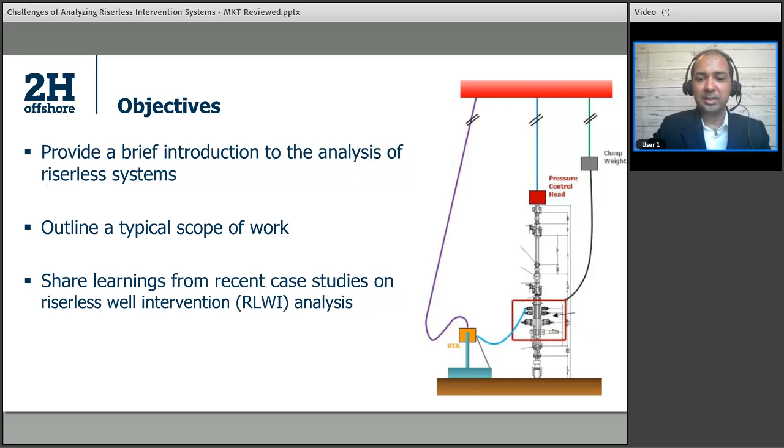The objective of this presentation today is to provide a brief introduction to analysis of riserless well intervention systems. We'll go over the typical analysis scope of work, since this is an analysis-focused presentation, but we'll also look at some of the components involved in riserless operations. We also have a case study on recent projects and work that we've done, so we'll share some learnings and findings from that as well.

We'll start off with an introduction to riserless intervention. We'll look at different types of interventions, and then specifically focus on riserless intervention and what type of equipment and system level components are involved. Then we'll move on to different analysis types and the codes involved in the analysis of these systems. And finally, the bulk of this presentation will look at the case study we worked on and the interesting findings as well as conclusions from that.

Well intervention is an important activity for any offshore well. It can be seen as a maintenance activity that you do to upkeep the performance of the well or do any repairs. So well intervention is basically your ability to enter a well safely with a well-controlled device and perform operations other than drilling. Depending on the operations performed, intervention can be classified as light, medium, or heavy intervention. Light intervention is the riserless well intervention or wireline operations that we are going to focus on today, and it typically focuses on wireline operations like logging, fishing for pulling out tools, or doing some maintenance activity, or taking readings on the well using sensors.

It may also involve some type of subsea pumping or circulation of fluids from the well. Medium intervention, on the other hand, is typically your coil tubing type of operation done for well stimulation or a few other things like zone isolation or reperforating a well. And then finally, you have heavy intervention, which can be looked at as a workover operation.

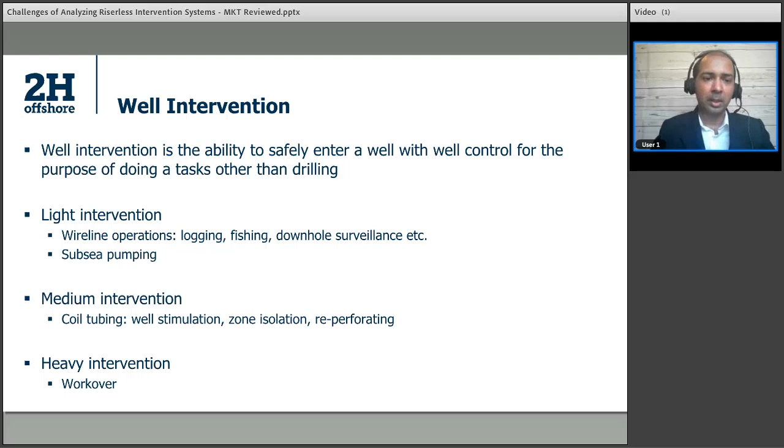You can look at the differences in these three types of operation in this picture. On the left side, you see light well intervention, which is the wireline operation, and typically this can be done by a small vessel. So the vessel required is not very high specification. It can be done from an offshore construction vessel or a small intervention rig. We've also seen that in shallow water, you can use barges for these operations. Basically you have a wireline and some downlines run from the vessel that interface with a subsea intervention package.

In the middle picture, you can see medium intervention that typically involves a small bore riser. This is typically a drill pipe riser, either between 5 to 7 inches of bore, and you have an intervention package subsea, and also a tensioning system from a tower on the surface. Finally, to the right, you have heavy intervention, which typically involves a drilling riser and a BOP package, and you can do much more complex and heavy operations with this. You can even run a landing string or another riser inside of this to either pull your tubings or do much more complex operations.

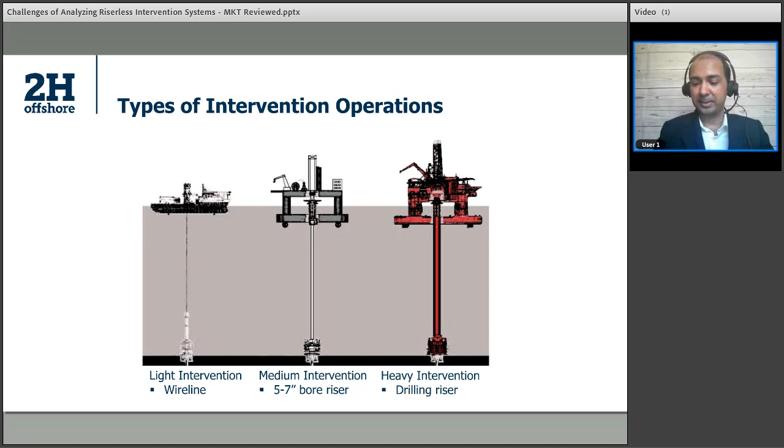So why riserless well intervention? The main benefit of this small lightweight riserless well intervention is that it's a very cost-effective solution because most of the time you need a small rig or a vessel of opportunity that can be used for this, which tend to have lower day rates.

And the equipment involved is also things like your wire lines, coil tubings, umbilicals, which is low cost rental equipment when you compare to typical offshore expenditure that you have on drilling and other activities.

So we came across this case study published in Offshore magazine where they showed that typical cost of this intervention operation was around 6 million. But by doing that operation, they could see an improvement in production of around 3,000 barrels per day from the well. And just based on the calculations, they could see a net present value of around 30 million by doing this operation over a period of 3 years.

So basically, the operation paid itself back in less than 3 months, and then you have this good increase in production from your well. So especially if you're in a low oil price environment where there's a lot of restrictions on operational expenditure, this can be a very cost-effective solution of boosting production from your wells.

So moving on to the system itself. This shows a layout of a typical riserless intervention system that we worked on. What you can see is you have an offshore vessel and you have an intervention package which is deployed on top of your well.

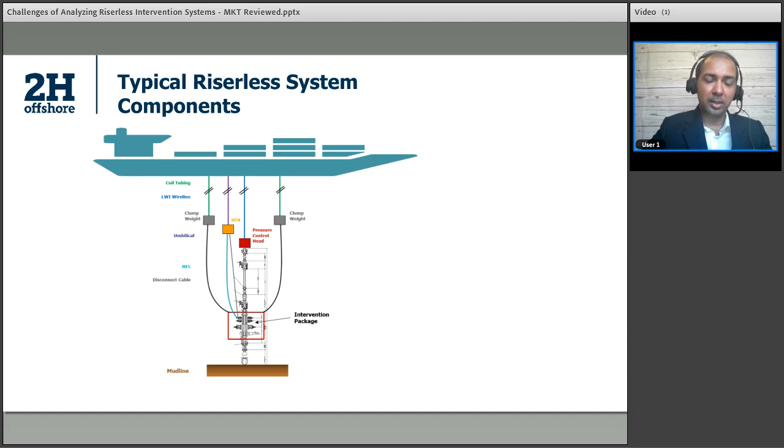And then you have these different downlines run from the vessel. In the intervention package subsea, you have these different components and they can vary based on the OEMs who are manufacturing it, but typically you would have a pressure control head, which is a sealing element that allows the wire line to move in and out without any leakage.

Then you also have an upper and a lower lubricator package. This allows for shearing of the wire line if there's a need for that. And finally, you have a well control package at the bottom, which is a primary well barrier, and it can be used again to shear the wire line or the tool string or coil tubing. It also provides power to the subsea tree for performing different operations.

On the line side, in the middle, the blue line you can see is a wire line which is run from the vessel, and it goes inside your intervention package through the pressure control head, and that's where you run your tool string. On the left of that, the purple line is an umbilical with an umbilical termination assembly at the bottom of it, and then a flying lead which goes from the UTA to the intervention package.

And depending on the operation that is to be performed, like in this case, they needed to circulate some fluids and pump some fluids. So they had two coil tubings, which are these green lines suspended with clump weights at the bottom, and another flying lead going to the intervention package. And these were Black Eagle types of hoses with passive disconnectors in them.

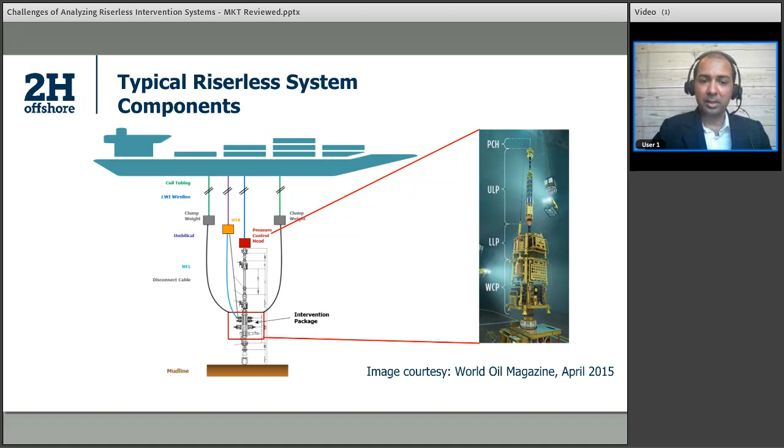So this just shows a layout of a typical system, but this may not be the exact system because there can be variations of this. There can be more downlines or less depending on what the purpose of the operation is.

So looking at analysis types and the scope of this work, typically the first thing that you would do is come up with a configuration for the system. So on the previous picture you saw you had these number of downlines. So you need to come up with optimum parameters for them.

So what should be the weight? What should be the clump weight? Do you need any buoyancies for your flying leads? How should they be spaced out with respect to the intervention package? How much slack do you need in the system? So you need to optimize all these parameters in order to have a functional system. So that's the first step.

Once you have that, the next thing you do is operability analysis that tells you what are the operating limits for doing these operations in terms of the allowable vessel offset, the current speeds in which this operation can be done, and also the wave heights.

And you do that by looking at a number of response parameters like how much stroke do you get in the wire line. Is there enough headroom for the wire line to accommodate the heave and the motions from the rig? The MBRs for these different flexibles and hoses that you have in the system, and then also stresses in your structural components like the coil tubing.

You also look at the drift-off analysis to see what happens in case you lose power, how fast the rig would drift away, and how much load it would put in the system. A weak point analysis is also an important activity, but different from a riser analysis where you're trying to see what would fail on the well. Here, the objective is to come up with sizing for different passive disconnect systems. I have a few slides on this, so I'll come back to it later.

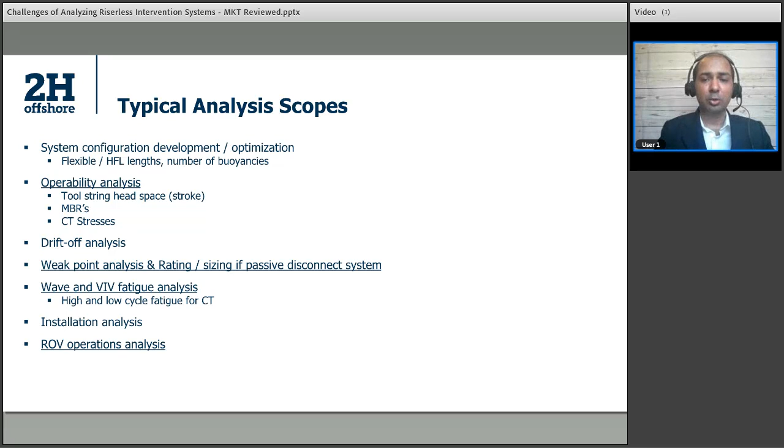Basically, we're trying to come up with the loads at which different downlines would disconnect from the well. You also need to look at fatigue analysis of the coil tubing because it's quite sensitive to environmental loads. We also look at installation analysis, both for the coil tubings and downlines, and for doing ROV operations.

Looking at design codes, the main challenge for analyzing riserless well intervention systems is that there's no dedicated published code you can use. There are a couple of different codes under work. There's API RP17G2, with a committee working on that, and the TR14, an intervention riser analysis technical report also being worked on.

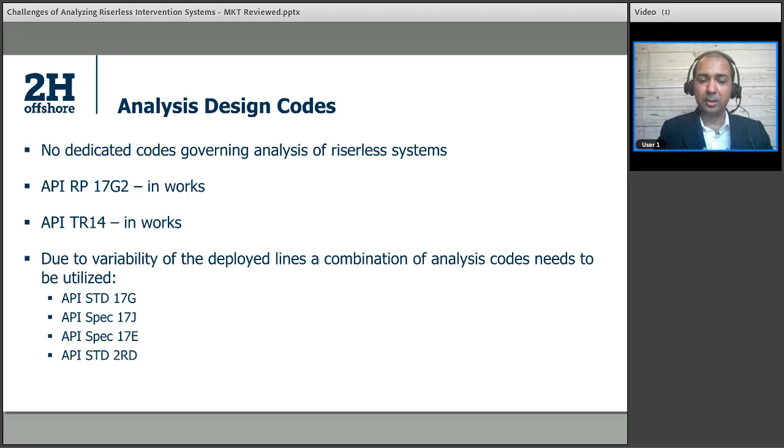Until these codes are published, you look at different options that are already published. You have API standard 17G, the governing code for intervention risers, and also standard 2RD, a global analysis code for production risers. You can use the guidance and methodologies in there. Then you rely on other codes like 17J and 17E, which have guidance for umbilical and flexible analysis. So you do a combination of global codes and component level codes to come up with a scope of work, a design criteria, and methodology for doing this analysis.

So moving on to the case study. We're looking at a well intervention campaign in the Gulf of Mexico. The water depth for these wells was in the range of 7,000 feet, and they had a few different wells.

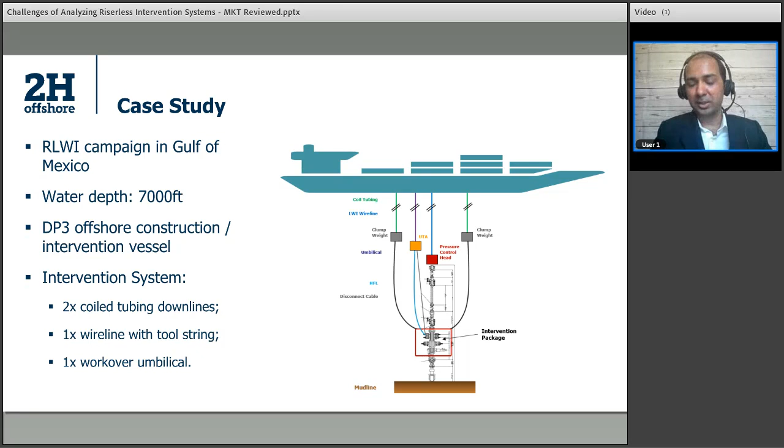These operations were performed using a DP3 type offshore construction rig, a small rig around 100 meters in length. They had a number of downlines: 2 coil tubings, 1 wire line, and an umbilical for the control system. For the umbilical, they had 2 options: one was free hanging as shown in this picture, and another was to install the umbilical on a subsea mud mat and run a flying lead from there.

This shows a top view of the analysis model and the layout of these different downlines. You can see the moon pool of the vessel, and the downline which is the wire line, shown as blue dots at the center, which runs and interfaces with the intervention package. The umbilical itself was run from the side of the vessel, with a flying lead taking it towards the intervention package. We also had 2 coil tubings deployed from the moon pool, not shown in this picture but visible in the model. So you have these different lines run from different locations on the rig, and they all converge at one point on the intervention package.

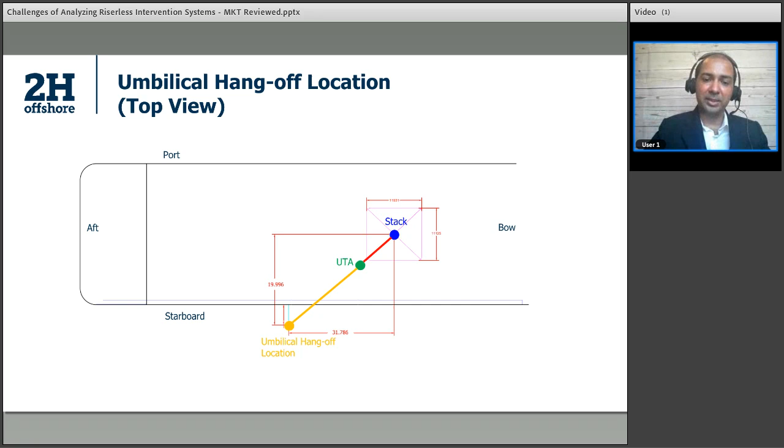When you model this, it becomes a 3D problem, and you can see the different snapshots. On the left is the elevation view. The yellow line is the umbilical with the termination assembly mounted on a subsea mat, with a flying lead towards the intervention package. Here's the subsea intervention package located on the well, with a wire line going through it. On the side you can see the coil tubings, the green lines, and the purple lines are the flying leads or black eagle hose with some slack, connecting with the intervention package. This shows the complexity of the model, because you have these 4-5 different lines which are run, and they are very low stiffness elements, so it can become quite an interesting problem just to build the model, make it converge, and run this analysis.

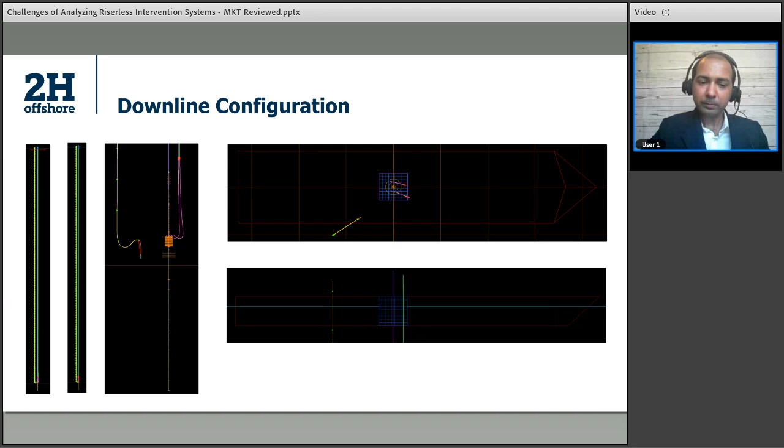So the next step we do is the operability analysis. For this, we're trying to establish the limits in terms of vessel offsets, currents, and waves in which these operations can be performed. We look at vessel offset all the way up to 10% of water depth, so for 7,000 feet, that's 700 feet from the well center. We also looked at surface current speeds up to 4 knots and bottom current speeds of 2 knots, because this particular field in the Gulf of Mexico did have bottom currents.

And then we're also looking at different types of waves, and current directions coming from different directions with respect to these downlines. The objective here is to run this load case matrix, different offsets times the currents times the waves, and then come up with an operating limit or an envelope within which the system can operate safely based on the response parameters of these different lines and their design criteria.

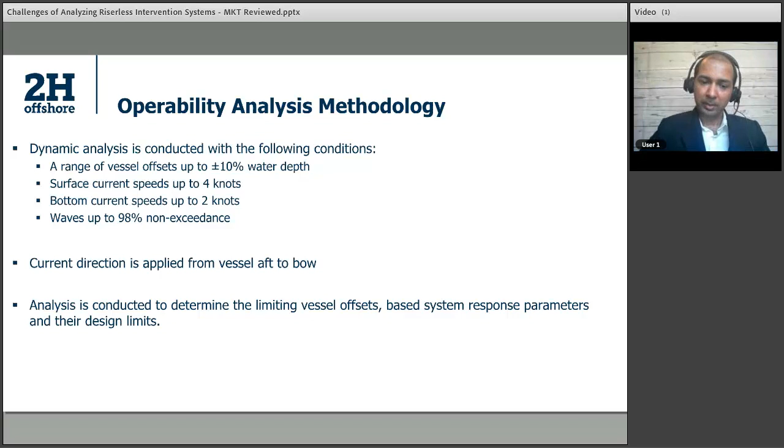So here's one result from the operability analysis. On this plot you can see the safe operating limits for this downline for this riserless system. On the x-axis you have vessel offsets, and on the y-axis you have surface current speeds. These different colors represent different bottom current speeds. This analysis is done for a 95% non-exceedance wave, and we did similar work for different waves, but this is just one example.

One interesting thing you can see from here is if you offset the rig on the right side, or in the positive offset direction, you see there's this connector which is the SECC connector. This is a passive disconnect mechanism in the system. So what it does is if you exceed 4,000 pounds in this connector, it automatically disconnects the line. This is a part of the coil tubing system. So you can see at vessel offsets around 4%, you would exceed the load in this connector and it disconnects.

If you are looking at high surface current velocities, you tend to get a lot of sail in your wireline, and that pulls your tool string up and you run out of headspace on your tool string. Hence this operation is limited by the tool string headspace for higher current speeds. And if you offset the rig in the negative direction, or upstream of the current, you start exceeding your coil tubing stresses. So it's an interesting finding that there's no one component which limits your operations—just depending on the type of load, whether it's current or wave, or the direction in which your vessel is moving, you can have different components driving your operating limits.

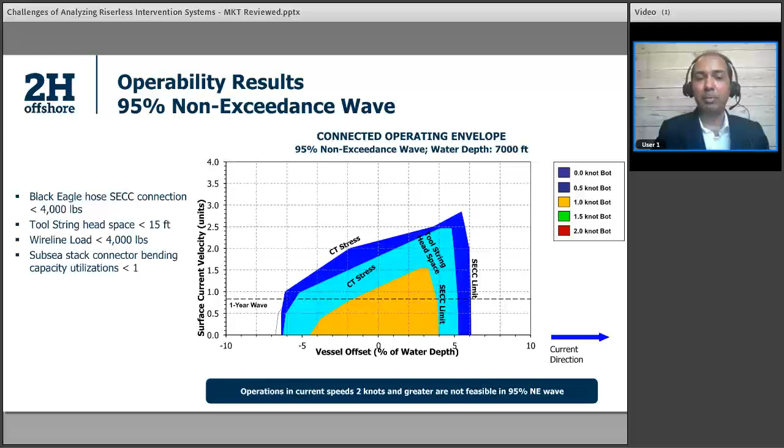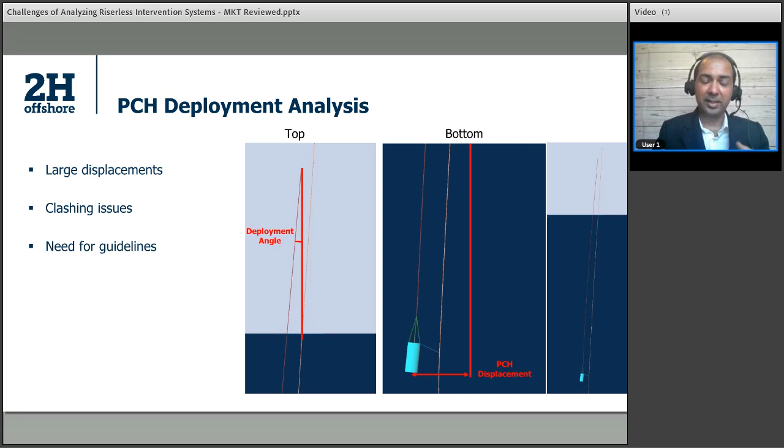So you can make judgments regarding the environments in which this operation can be performed, and also determine the loads in the tether, so you could select the right configuration and specification so that it does not get damaged during the operation.

We're looking at an emergency disconnect mechanism for the downline. If you're familiar with riser systems on drilling risers and intervention risers, they have an emergency disconnect mechanism where you hit a button on the rig, and a connector can disconnect the LMRP from the BOP, or your EDP from your LRP. For riserless systems, there's no active disconnect mechanism, so they have to rely on passive disconnect.

Typically this is done using the SECC disconnect mechanism, or some shear pins, or a wireline. The mechanisms are set such that once you exceed the load or a torque in these, you achieve a disconnect. In this case, we had the umbilical deployed, and in the flying lead of the umbilical, which you can see in the catenary shape, there was a line run in parallel to that—this green line over here. The green line, or wireline, was selected such that its length was shorter than the length of the flying lead.

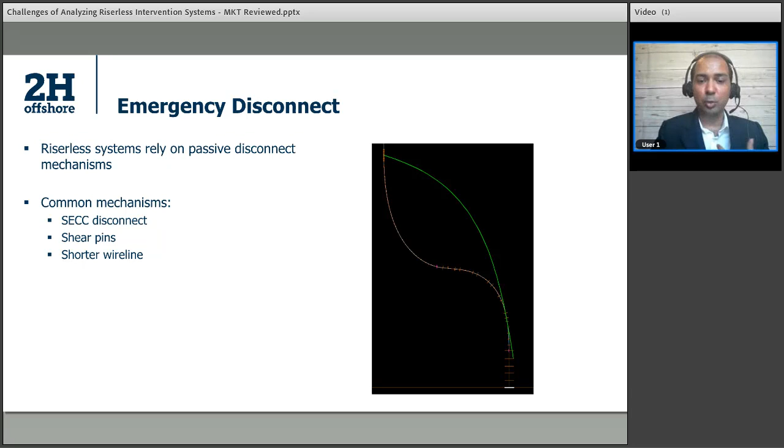So in case of large deflections, the wire line can pick up loads and trigger a disconnect mechanism. This example shows the wire line connected to a valve which could be triggered at a force of around 1200 pounds.

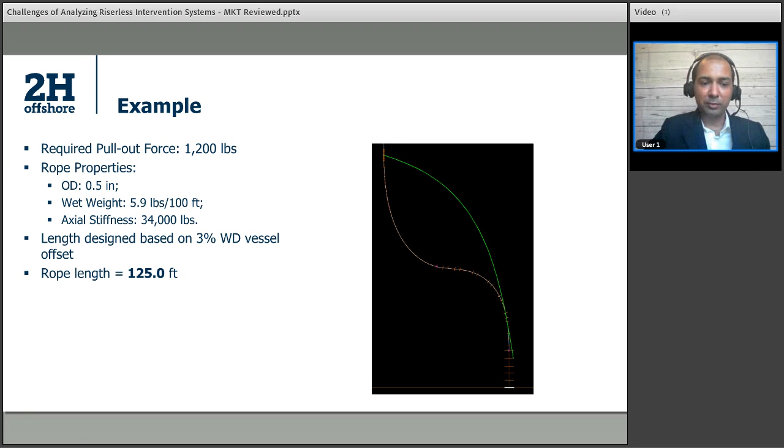Based on the properties of the wire line, which was a half-inch diameter, and its stiffness, we were able to select a length of around 125 feet, such that it would disconnect at a vessel offset of 3%. That way you're not disconnecting the wire for small currents or small offsets. If this wire line is shorter than intended, you would tend to disconnect at regular intervals and have to have an ROV go and redo the connections. So having the correct length of this wire was important.

You can see the example here with different current speeds, 2 knots to 4 knots, and different vessel offsets. This analysis shows, for different combinations of offsets and current speeds, how much load is picked up by this wire line. Once it becomes taut and starts picking up load, we sized or specified a length so that you can trigger your disconnect at a predetermined offset.

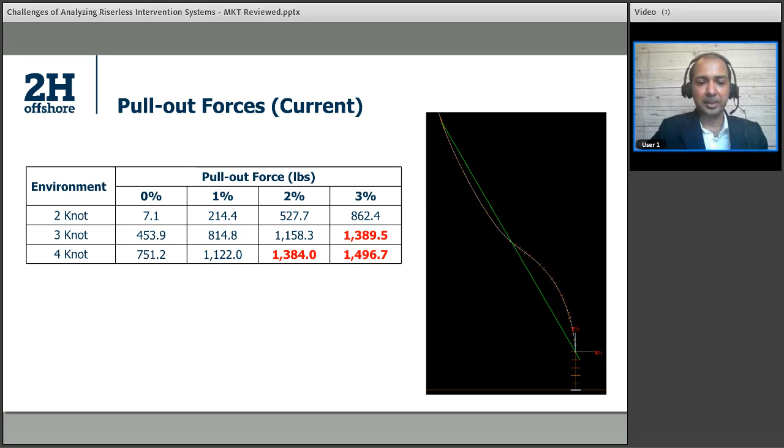Next, I'll move into coil tubing, which is part of riserless intervention. A lot of times coil tubings are used for circulation operations. In our experience, coil tubing tends to be the most limiting component for these operations, because it's highly sensitive to the current profile applied as a load, the operating pressures used, and the design criteria selected. I'll go into each of these parameters over the next few slides. We were able to enhance the operability of the system by doing sensitivities on these parameters and come up with an optimized solution showing much better operability for the coil tubing.

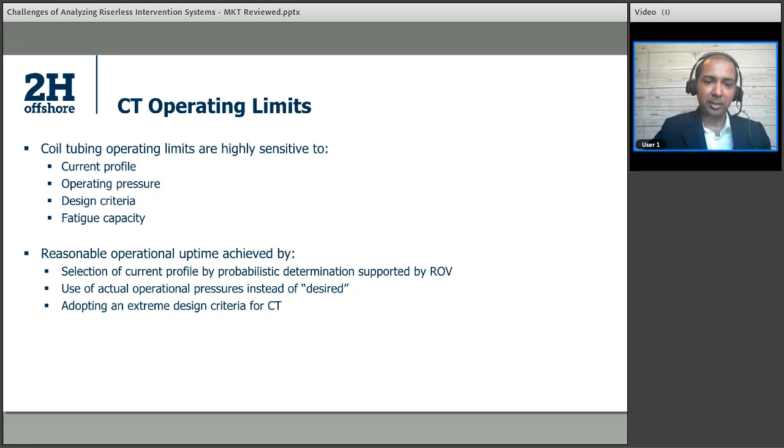First, the current profile you select. For this operation, if you use a low shear current profile—meaning a current that does not die down quickly, staying strong throughout the depth of the water column—we saw operations were limited to 1.5 knots of current speed with no wave loading, and just above 1 knot with a 95% non-exceedance wave. But when we did a probabilistic assessment, we found that the low shear profile, though conservative, occurs less than 0.5% of the time during the year.

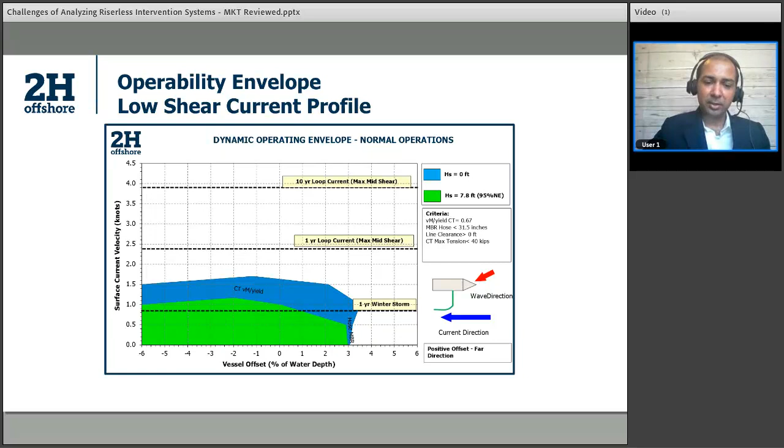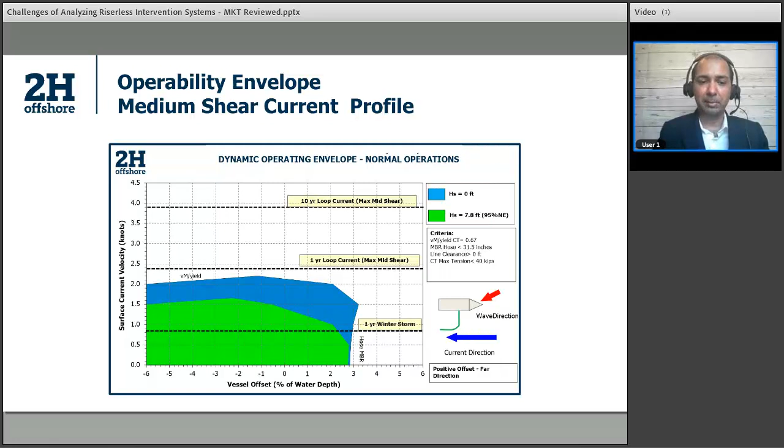So we suggested using a mid-shear current profile, which typically concentrates at the surface and does go down a bit, but the data showed this profile occurred over 60% of the time during loop currents. Using a medium shear current profile, you could operate in current speeds up to 2 knots or slightly above. Just selecting the profile using a probabilistic assessment from the available data made a big difference in the uptime for these operations.

One rationale behind using an extreme design criteria was that these were temporary operations, and secondly, coil tubing anyway goes through plastic deformation when reeling and unreeling, unlike a riser pipe which stays unstressed most of the time and only sees stresses when deployed. So in agreement with the operator, we showed that if they went with an extreme design criteria for temporary operations, they could operate in higher environments if needed.

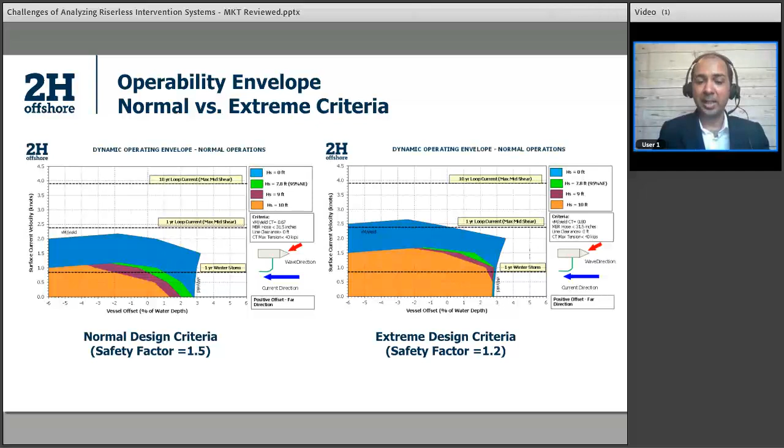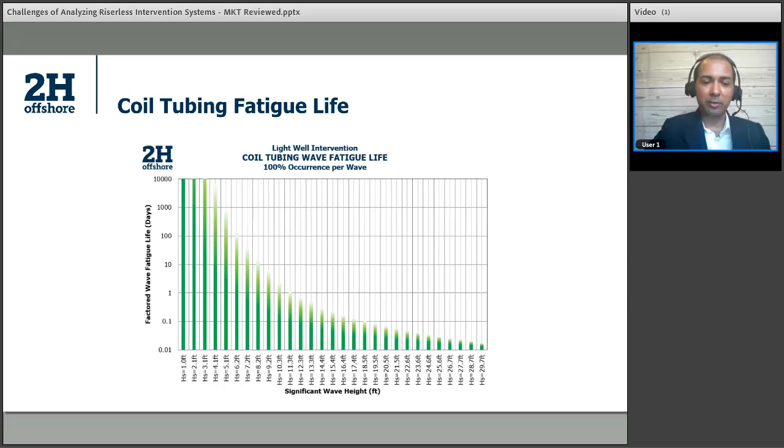But if you're in wave heights of say 10 feet, your fatigue life could be just 1 day. So the fatigue life of the coil decays exponentially with increasing wave height, so you have to be wary of the wave heights in which these operations can be performed. You always have the option of reeling in and reeling out the coil tubing to change the fatigue hotspot and increase the life you get from it. But it's good information to have to look at fatigue for these systems.

Moving into ROV operations analysis, a lot of these downline operations for the riserless system are supported by an ROV, whether it's to make up the connections for the flying leads, monitoring the systems, or moving from one well to another. The ROVs can be quite useful.

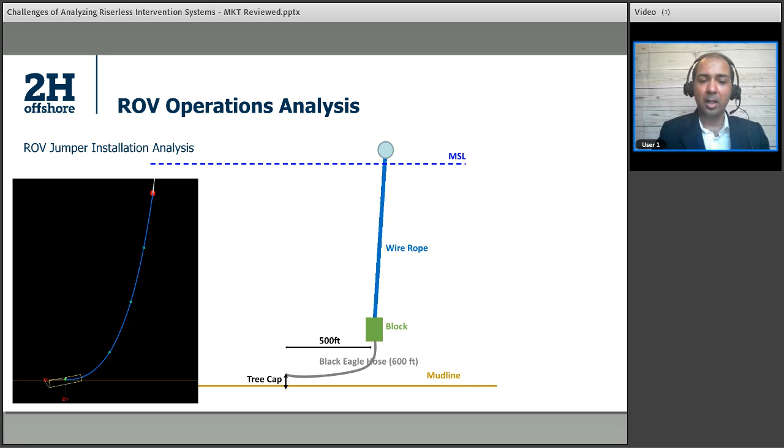We looked at an ROV jumper installation analysis. In this case, they wanted to deploy the jumper on the wire rope, and at the end of it, you had an ROV which would move or displace the end of the jumper by about 500 feet. They wanted to see how much load the ROV would experience during these operations, because it had a limit of around 250 pounds of force that it could pull on these jumpers.

When we did the initial analysis, what we saw was that the loads the ROV was seeing were much higher than its capacity, and the solution to overcome this problem was to install some buoyancy modules on the jumper during the installation operation. Once the installation is done, they would remove these buoyancy modules. The thing they were looking at was how many buoyancy modules were required and how they needed to be spaced out for this operation.

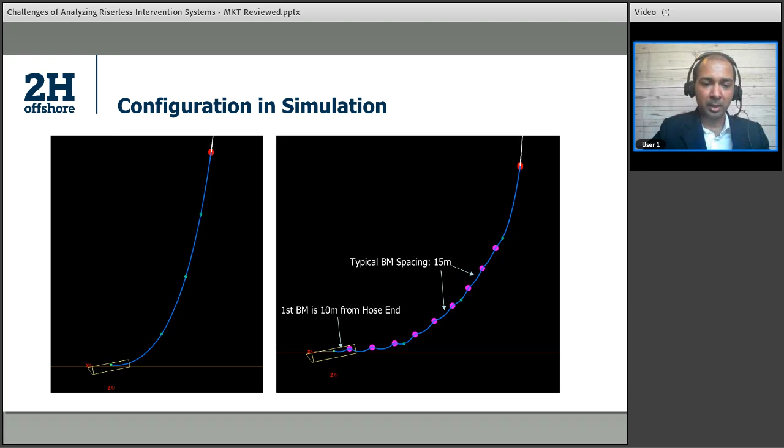So we did this simulation. This is a video, I hope this works. What we did in the simulation is simulate the motion of the ROV pulling the end of the jumper and making the connection with the intervention package. We did this with different buoyancy modules, and we also looked at different speeds at which the ROV is moving, and different bottom current speeds that the ROV can encounter.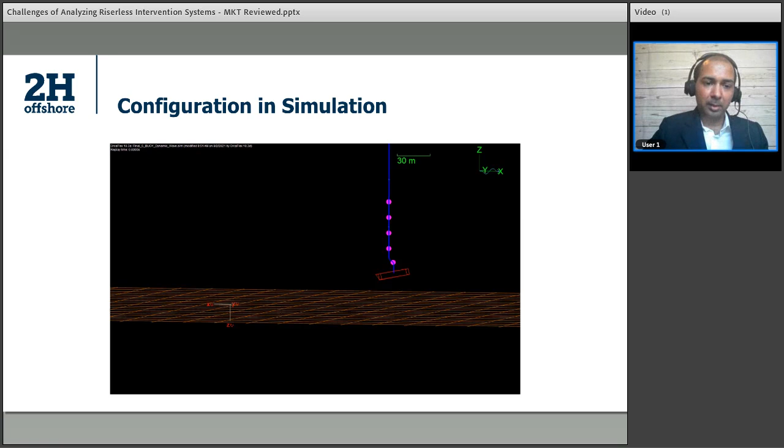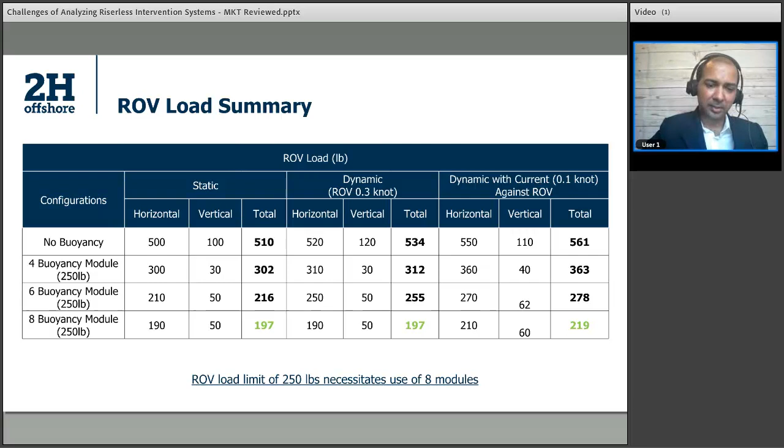Based on that, we came up with this table which shows that with different buoyancy modules, how the forces that the ROV sees in the horizontal and vertical direction can change. This gave them good information that if they used around 8 buoyancy modules, they could get the total force to less than the capacity of the ROV. So this was information that they were able to use for their operations.

All right, so that brings me towards the end of my presentation. To summarize it all, I would say the key finding or the key takeaway from this is that the operating limits for riserless systems can be fairly limited, especially if you compare it with typical riser systems.

Typical drilling risers or intervention risers can operate in a 1-year winter storm or even stay connected in a 10-year winter storm. But the riserless well intervention, you can see issues with wave heights anything above 8 or 9 feet, and currents above 2 knots.

The main reason is that the coil tubing is one of the main limiting factors, both in terms of its strength and fatigue capacity. Secondly, all of this equipment is lightweight and is quite susceptible to environmental loads.

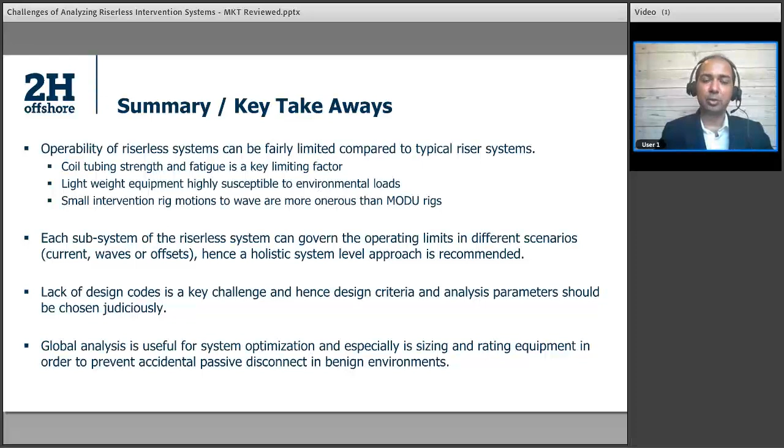Lastly, a lot of these operations typically are performed using a small intervention rig, which tends to have much higher motions compared to a MODU rig or a drill ship, which is quite stable. Just because these components are lightweight and tend to move a lot, you see much higher bending loads, and that tends to limit your operations.

Secondly, there's no one given component that you can say it's the wireline or coil tubing that would drive the limit. So it's important that you look at it holistically—if you have all these different systems modeled, you can look at the interaction between them and also see what is driving your operating parameters or operating limits.

Another thing to keep in mind is because there's a lack of design codes, it's important to select a design criteria as well as analysis parameters carefully at the beginning of the project. Selecting the exact or right design pressure or the right parameters in which these operations will be performed can help in avoiding being overly conservative in your assumptions, which may show that these operations aren't feasible.

And finally, the global riser analysis, when you look at it, turns out to be a quite useful tool, mainly if you're looking to optimize the system. Where it comes in handy is in terms of rating the equipment and sizing it.

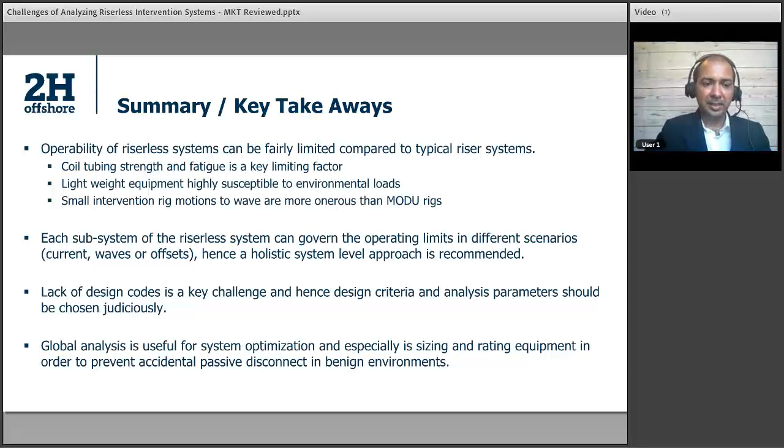With that, that's the end of the presentation, and I'm happy to take any questions that you may have.